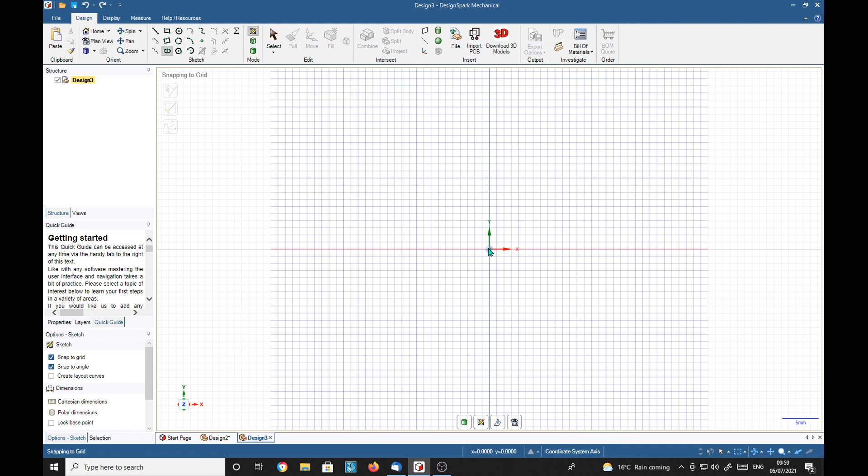And for this bowl we're going to make one the size we want, and we're going to start with an ellipse, and we're going to make this 150 by 100.

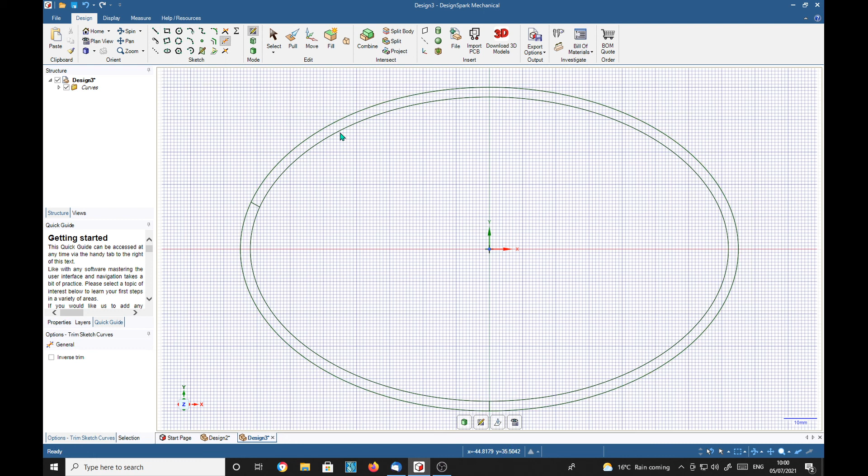Then the offset curve, and I'm going to make that 3mm, and we're going to chop it down to about here, and also down the middle. And T for trim, get rid of that part, that part.

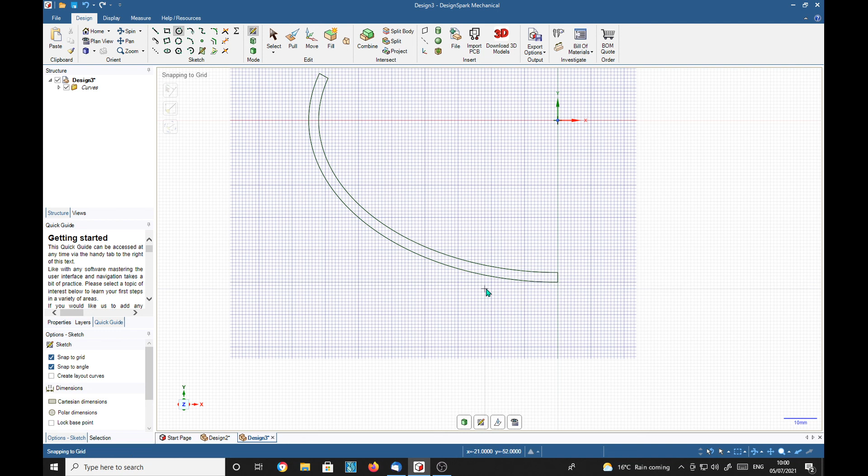Now we're going to put this little rim on the bottom. So we're going to select the circle. Now that's the very bottom, so we want something a bit lower than that, say 2mm down about here. I'm going to put a 2mm circle here. Let us zoom in a bit.

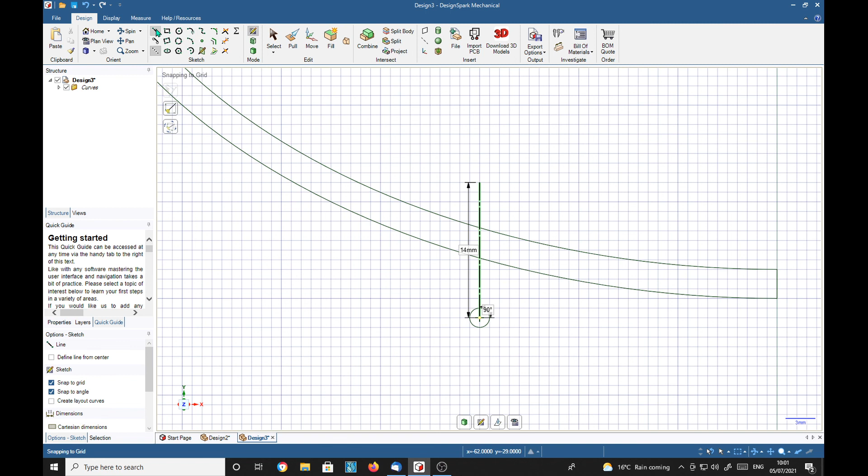Now to make this nice and symmetrical, construction line, and right click and make it into a mirror. Straight line. Now, no, we're going to select this one here, tangent line, which means that when we select the circle, no matter where we draw it, the line will always remain a tangent to that line.

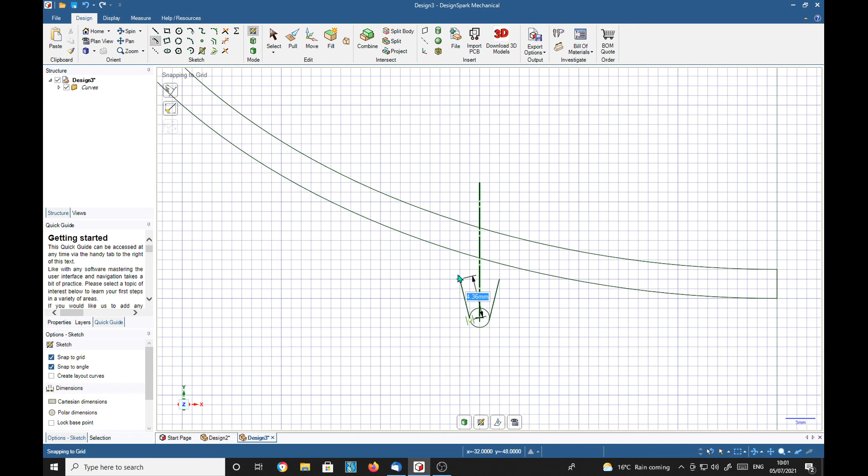So we're going to have a bit of a taper on it. Don't take it to there, otherwise it'll try and find a tangent to this line or there. So whatever looks aesthetically pleasing to you, going to make that. Now we don't need this mirror line anymore. We'll just delete it.

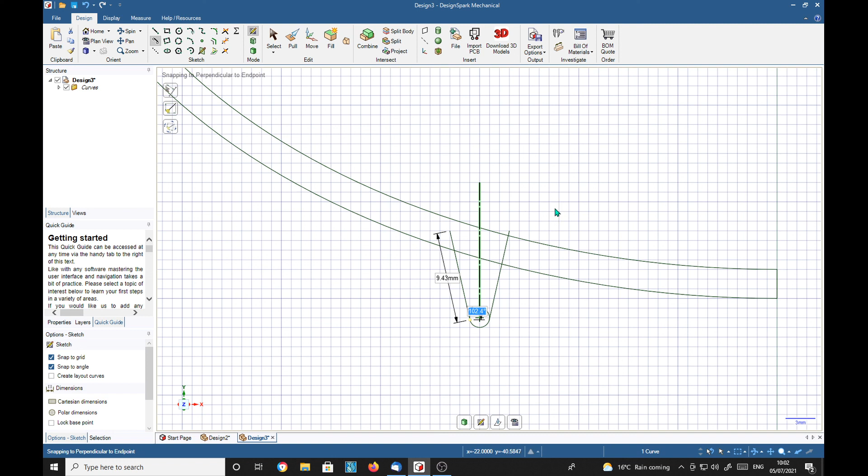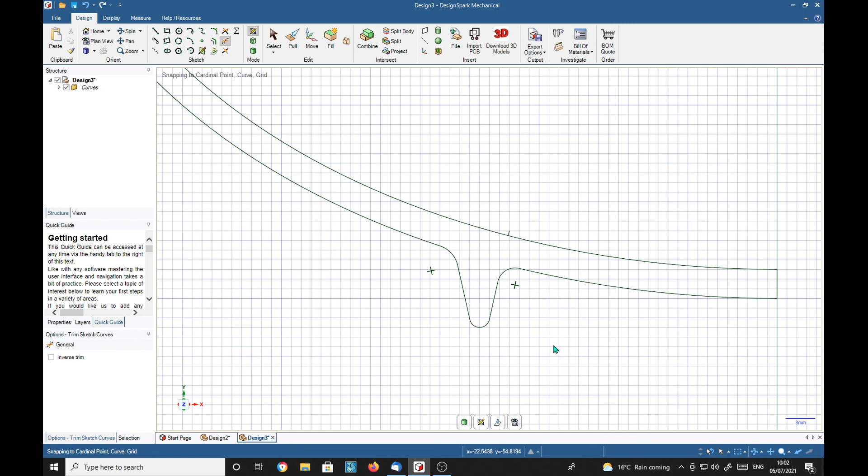Select create a rounded corner. That looks nice. Do the same here, there, and T key for trim, trim that off, and P for pull. Select it, rotate it, select an axis, this one down here is our axis, full pull, oh, that looks beautiful to me.

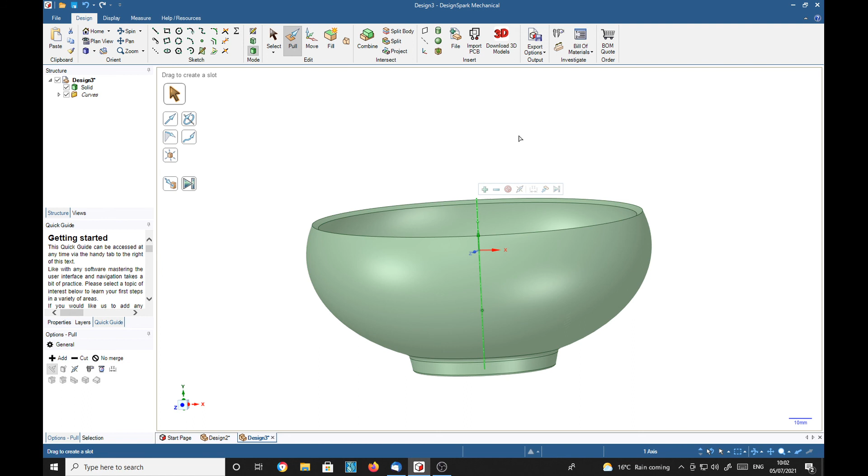Select the center line, press the X key and the V, and now you see our little rim is below the level of the bottom of the bowl, which will sit nicely on any table.